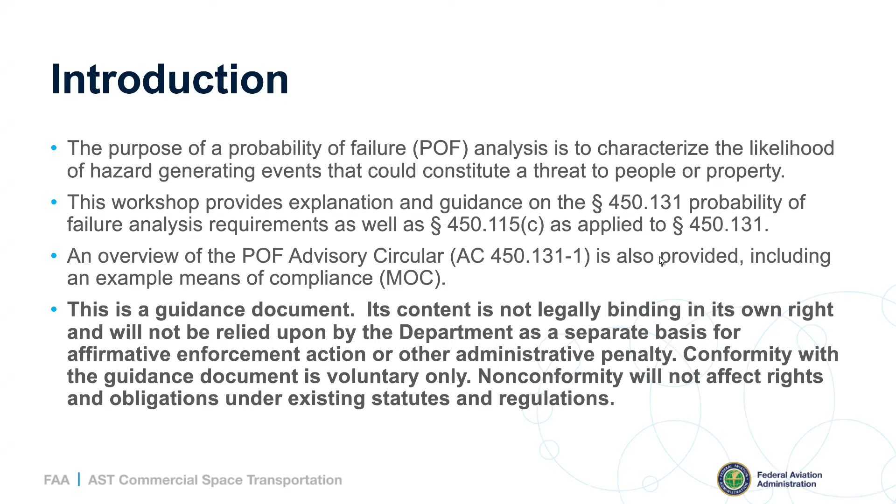Okay, so for this first section of the slides, I'm going to go over an explanation of each part of the 450.131 requirements. So 450.131(a) is a general overview of 131, and it states for each hazard and phase of flight, a flight safety analysis for a launch or reentry must account for vehicle failure probability. The probability of failure must be consistent for all hazards and phases of flight. So before I get into this, the way the AC is laid out and the way these slides are laid out, we go into detail on specific phrases used in the AC so that you all get a better understanding of the intent of the requirement.

So for example, 450.131(a) uses the phrase vehicle failure probability. This is the likelihood that a launch or reentry vehicle has a failure during flight. When we say for each hazard in the requirement, for each hazard means debris risk analysis, far field overpressure blast effects analysis, and toxic hazards. And then it also says for each phase of flight, the failure probability must be accounted for. So a phase of flight is a period of flight between two milestones in the vehicle flight sequence, where the probability of failure distribution for each reasonably foreseeable failure mode is homogeneous. A phase of flight can be discrete, such as stage separation, or it can be continuous, such as a stage burn.

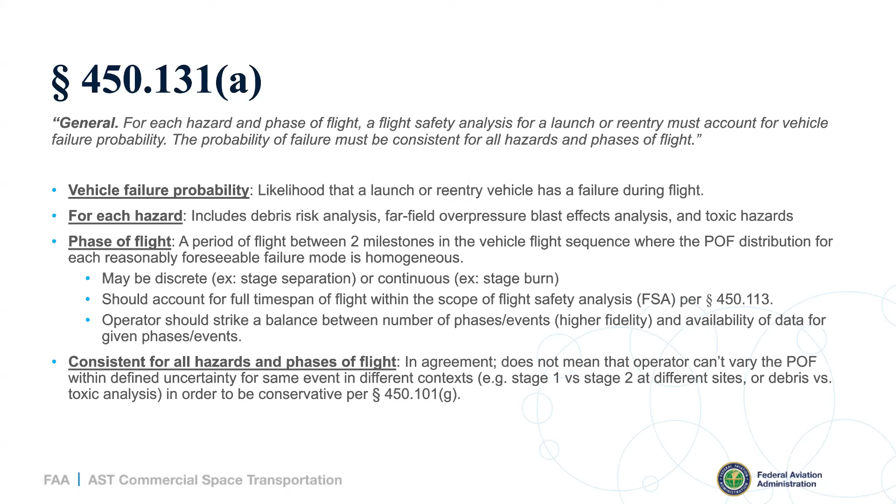Okay, so 450.131A describes the requirements for a vehicle or vehicle stage with fewer than 2 flights. And it states, for a vehicle with fewer than 2 flights, the failure probability estimate must account for the outcome of all previous flights of vehicles developed and launched or re-entered in similar circumstances. So the first thing to note here is the probability of failure requirement treats probability of failure analyses differently for the first 2 flights of a subject vehicle than flights after that. Historical data shows that experience makes a significant difference in failure likelihood.

One second, please. Can you go back? Sorry.

So how do you determine what constitutes a vehicle or vehicle stage in this context? So significant upgrades or configuration changes to a subject vehicle may make past flight history inapplicable or less relevant. And by less relevant, I mean weighted less if you're using a weighting methodology. So for example, significant upgrades or configuration changes can include an entirely new or upgraded stage, a new vehicle developer, if a vehicle is built up of stages and guidance systems on previous vehicle versions, but not as an integrated vehicle. So those are some examples of significant enough upgrades to make past history inapplicable or given less weight.

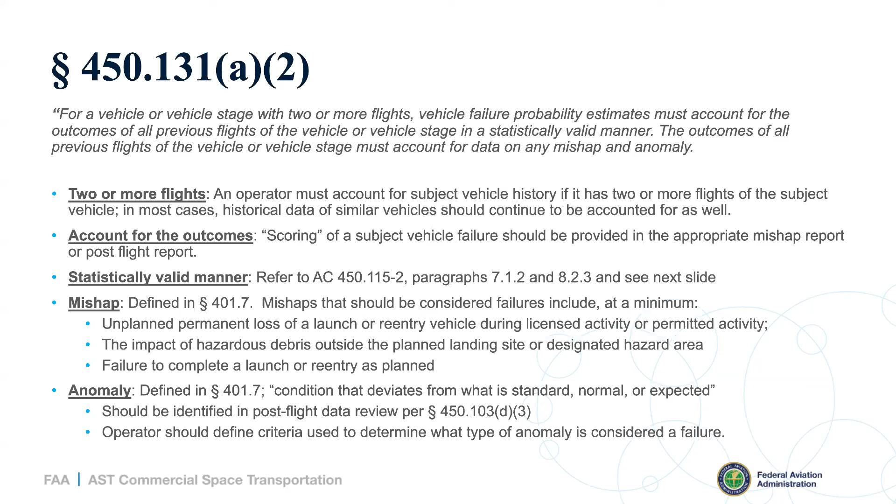Okay, so this is a little more on statistically valid manner. So an operator should have criteria that they should use as the checkpoint for the probability of failure method reevaluation. So basically, after a failure, an operator should have some kind of check to determine that their probability of failure method is still valid, or if it needs major or minor updates. This helps to continue ensuring compliance with 450-101G. That states that the method must produce results consistent with or more conservative than the results available from previous mishaps.

We did provide an equation that an operator may use as this checkpoint, and that's shown on the slide here. The inputs are the difference between flight ordinals of the two most recent failures, and then the conditional probability of failure predicted for the most recent failure. If the equation above holds true, the operator should then consider whether method updates are warranted.

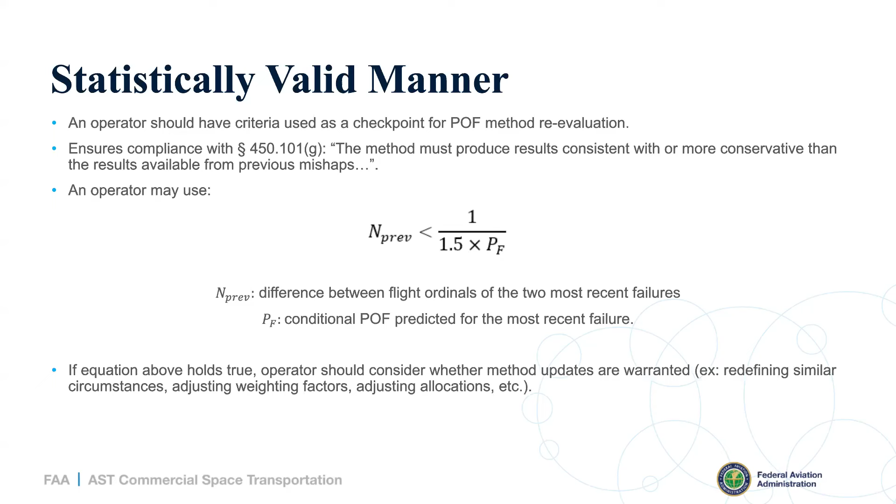And on purpose, we're not prescriptive about what warrants a method update, whether that's redefining similar circumstances, adjusting weighting factors, adjusting allocations, or perhaps the circumstances warrant no method update with justification provided. This is just to be used as a checkpoint. Okay, next slide.

So there was a question before we move on. There's also a question in the chat from Matt Georges. Are further productions of the same vehicle with the same production method considered new vehicles? Well, I would say that is not a sufficient criteria to determine whether or not a vehicle is new. Obviously, the similarity of design between a vehicle and a derivative or another one is the key thing.

So yes, there's not a firm line because we know vehicles are evolving with time, but the draft AC has some examples of what does constitute a new vehicle versus one that's still the same vehicle. So I would check the AC. There's more there, but same production methods is not a sufficient standard. Okay, thanks, Eric.

Okay, so 450-131B provides a definition of failure for use in the probability of failure analysis. For flight safety analysis purposes, a failure occurs when a vehicle does not complete any phase of normal flight, or when any anomalous condition exhibits the potential for a stage or its debris to impact the Earth or re-enter the atmosphere outside the normal trajectory envelope during the mission or any future mission of similar capability.

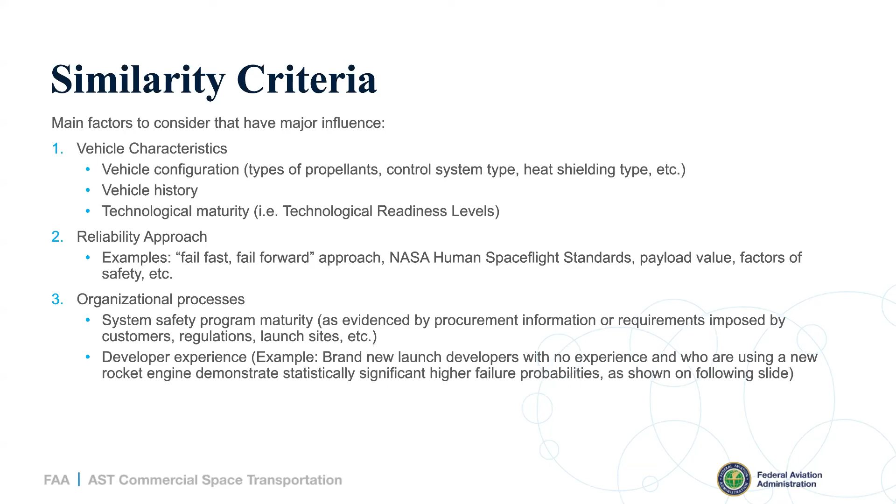Yes. Great. Okay, yes. So previous flight is defined in 450.131C. So for flight safety analysis purposes, the flight of a launch vehicle begins at a time in which a launch vehicle lifts off from the surface of the Earth. And then a flight of a reentry vehicle or deorbiting upper stage begins at a time in which a vehicle attempts to initiate a reentry.

So this goes back to a few of the questions we got. So this definition should be used to determine applicable flights of the subject vehicle or those historical vehicles that are developed and launched or re-entered in similar circumstances. So this may include amateur rockets, permitted activity, U.S. government launches, foreign launches, etc., or re-entries.

So what does liftoff from the surface of the Earth mean? So this occurs when a vehicle moves relative to the launch platform, whether that's land or water. This does include captive carry unless the demonstrated reliability exception applies for 113B. A deorbiting upper stage is a stage that returns or attempts to return from orbit to Earth in a controlled manner, including disposal. And then the time in which a vehicle attempts to initiate reentry is, we define this as the time at which reentry flight begins, a scope of license per 450.3C.

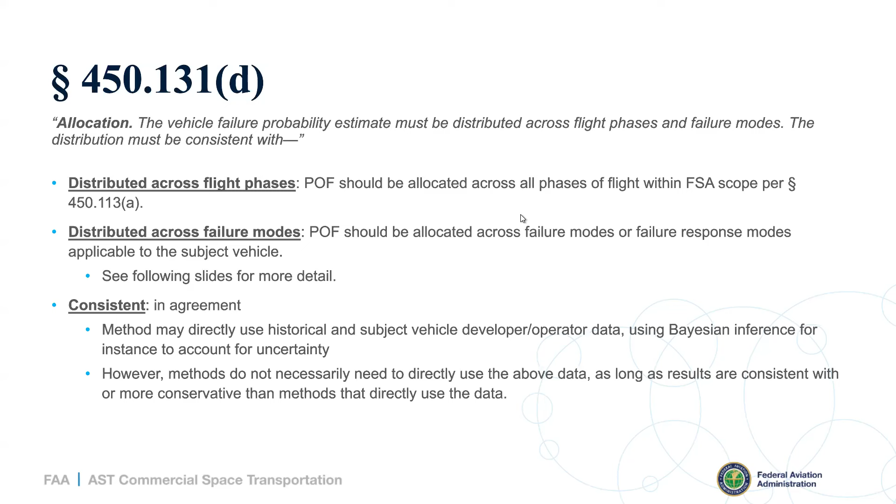So first we'll go into failure modes. So a failure mode is a unique combination of three elements: the initiating subsystem or system of the failure, the resulting manifestation of the failure, and the flight event where the failure occurs. So failure modes are used to classify historical failures and should be linked to the subject vehicle's functional hazard analysis.

So there are some examples of failure modes here. A propulsion system failure, turbopump failure of the only engine leading to a total loss of thrust during stage 2 burn, a guidance system failure leading to total loss of thrust during stage 2 burn, a propulsion system failure leading to no thrust during initiation of stage 2, and a flight safety system failure, such as data to the MFCO screen lost, leading to a loss of thrust during stage 2 burn. So these examples were chosen because they show that multiple failure modes may have the same response, which is that stage 2 loss of thrust.

The initiating subsystem element is necessary because what causes one type of failure on a historical vehicle can cause a different failure on the subject vehicle. For instance, an engine failure may result in a loss of thrust response for a single engine stage, but it could result in a degraded thrust response on a multi-engine stage. So the next slide, I'll discuss more on failure response modes.

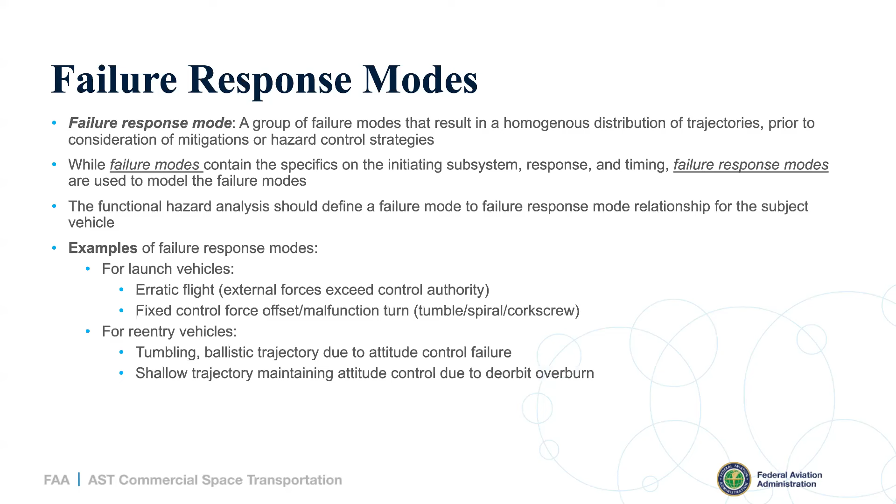So for launch vehicles, that would be erratic flight, or fixed control, force offset, or malfunction turns. For reentry vehicles, that could be a tumbling ballistic trajectory due to attitude control failure, and a shallow trajectory maintaining attitude control due to deorbit overburn. Next slide, please.

Okay, so the next few slides describe the data that the allocation must be consistent with. So the first part is the data available from all previous flights of vehicles developed and launched or re-entered in similar circumstances. So similarity criteria, as described previously, should be used to collect historical failure data to be used as the basis for the failure mode allocation.

It's also noted that the similarity criteria here may be less restrictive than the criteria used for calculating the overall probability of failure or the by-phase probability of failure due to limited failure data. What's most important is that the failure modes are reasonably foreseeable for the subject vehicle and phase event.

So an example given here, turbo pump failure of a liquid propellant engine during stage 1 burn would be a credible failure mode for other liquid propellant engine burn stages, but it wouldn't apply to a solid propellant motor burn stage. Next slide, please.

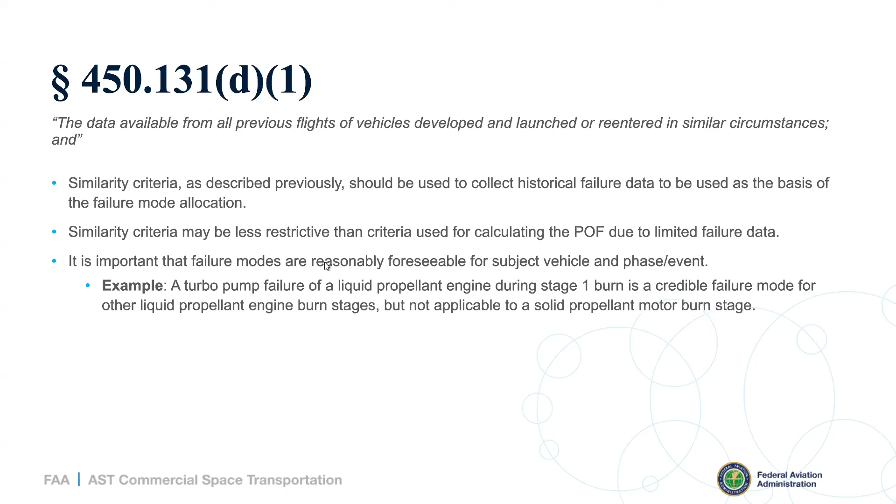So the allocation must also be consistent with the data from previous flights of the vehicle stages or components developed and launched, re-entered, flown, or tested by the subject vehicle developer or operator. Such data may include previous experience involving similar vehicle, stage, or component design characteristics, development and integration processes, including the extent of integrated system testing, and level of experience of the vehicle operation and development team members.

So previous experience of the subject vehicle developer or operator should be accounted for when determining the probability of failure allocation, in addition to the flight outcomes of vehicles developed and launched or re-entered in similar circumstances. Previous experience may include past launches, re-entries, and tests, and that may include drop tests or glide flights. Tests may also be considered inapplicable or given less weight if the test environment was less severe, or if the intent was to test to fail, etc.

And then similarity criteria, as described previously, again, may be considered here as applied to previous experience of the subject developer or operator for allocation purposes. So an example is if there's been significant staff turnover since the developer or operator's previous experience, and the new staff doesn't have a lot of experience with the new technology, then the previous experience may be weighed less when determining allocation. Next slide, please.

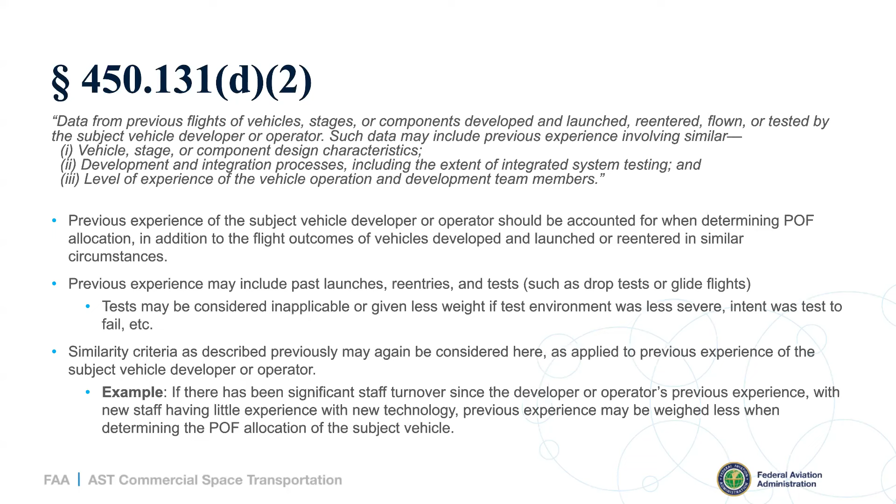Okay, so 450.131(e) describes the requirements for observed versus conditional failure rates. The probability of failure allocation must account for significant differences in the observed failure and the conditional failure rate. A probability of failure analysis must use a constant conditional failure rate for each phase of flight, unless there's clear and convincing evidence of a different conditional failure rate for a particular vehicle, stage, or phase of flight.

So first, we define observed and conditional failure rates. The observed failure rate is the ratio of failures to attempts in a defined period of flight divided by the duration of the period. You'll also hear this called the unconditional failure rate or the absolute failure rate. The conditional failure rate is the probability per unit of time that a failure will occur at a given time, assuming success prior to that time. And we'll show some examples in the next couple slides.

So what does "must account for significant differences" mean? This means that when calculating the observed failure rate, the likelihood of success in previous phases should be included in the calculation. Constant conditional failure rate is one that is uniformly distributed over time. This is a reasonable assumption to use unless there is clear and convincing evidence otherwise.

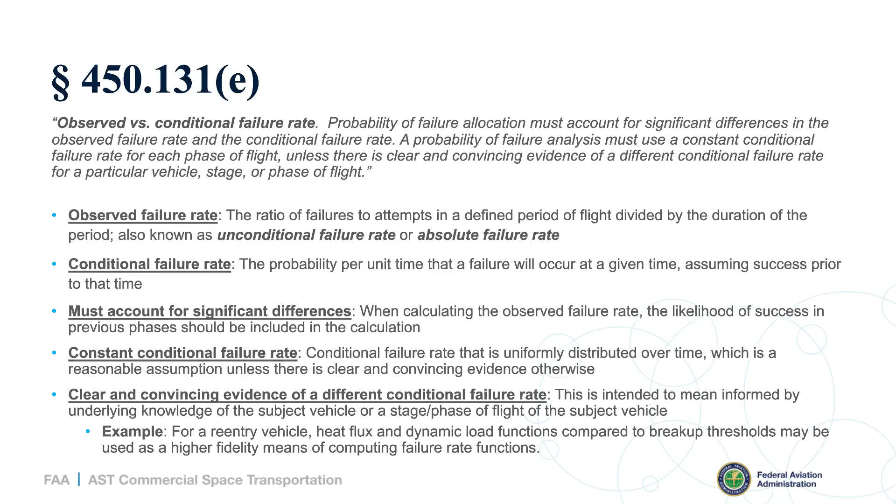So the failure rate equations for a constant conditional failure rate and the observed failure rate are given here. The draft AC also has worked out examples for a simple two-stage launch vehicle. Next slide, please.

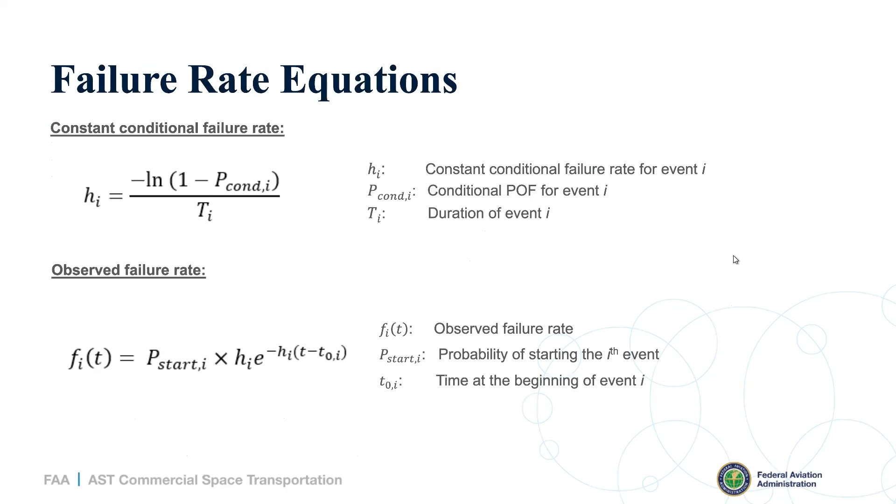Again, the full worked example is in the draft AC, but you can see the results here, again, for a simple two-stage launch vehicle, assuming a constant conditional failure rate. The plot shows that the observed failure rate in the dotted line here is lower than the conditional failure rate. And that's because the probability of early flight failure makes it less probable that failures at later flight times will be observed. Next slide, please.

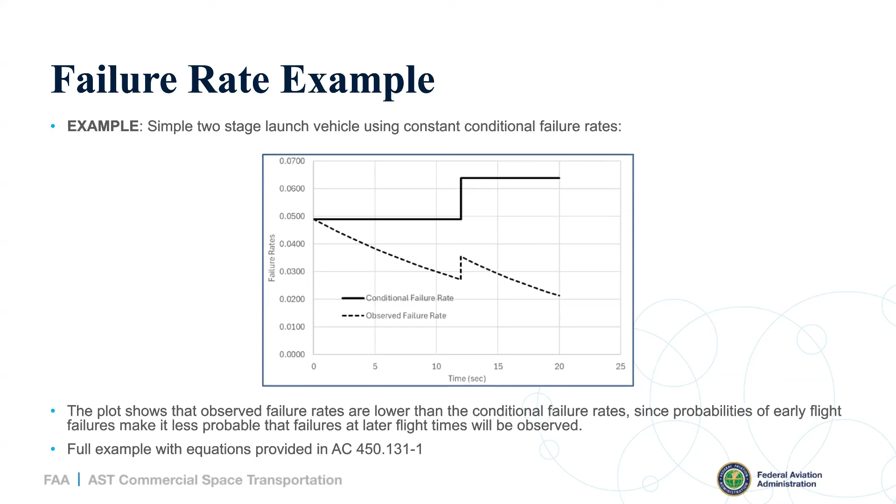So next we'll go over the application requirements for 450.131. So the first application requirement is a description of the methods used in the probability of failure analysis in accordance with 115(c). So a lot of that is what I've discussed already today. The probability of failure method should address each part of 131(a) through (e), as well as each part of 450.115(c)(1) through (6). And I'll talk a little more about the 115(c)(1) through (6).

Some resources are listed here as well. The AC 450.115-2 provides general guidance on documenting an FSA methodology. And then the draft AC for 131 provides a thoroughness checklist that an applicant can use to ensure that they have met each part of the requirement. Next slide, please.

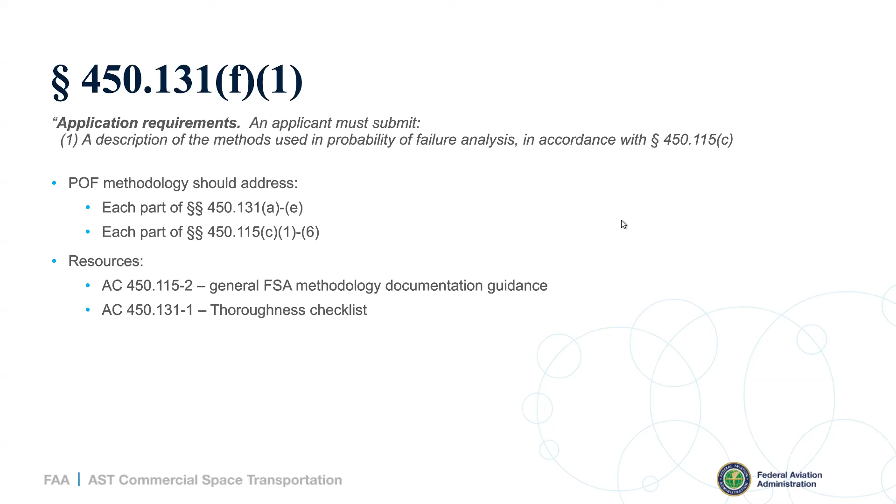And then next, an applicant must submit a representative set of tabular data and graphs of the predicted failure rate and the cumulative failure probability for each foreseeable failure mode. So to break this down a little further, the tabular data should include the conditional failure rates by failure mode, the cumulative observed probability of failure by failure mode, and then the total observed probability of failure. The graph should include the observed failure rates by failure mode and the cumulative observed probability of failure by failure mode. And I'll show examples on the next slides.

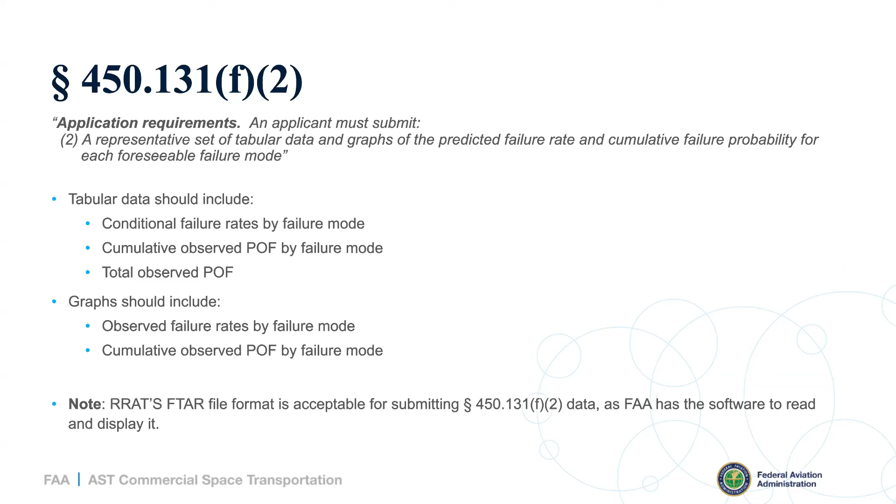Also a note here, RRAT's FTAR file or ABRDR's FTAR file format is acceptable for submitting this tabular data and graphs, since FAA has the software to display it. Next slide, please.

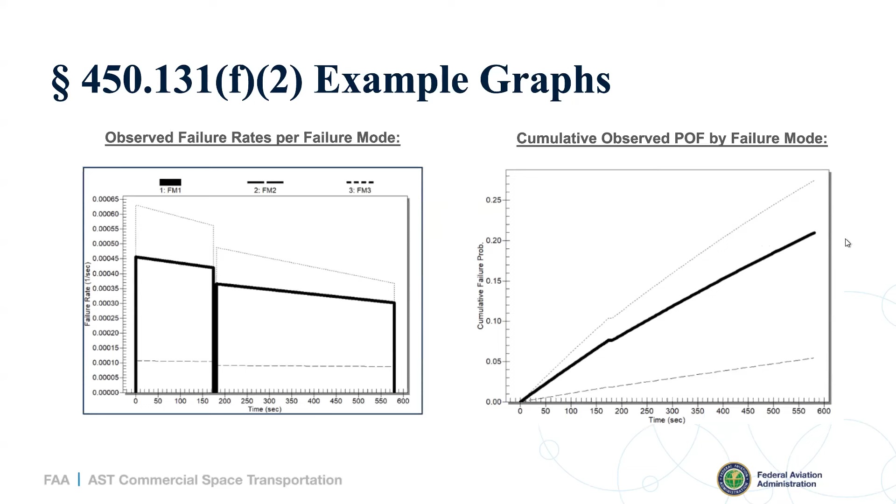Okay, so as I mentioned before, the probability of failure methodology should address each part of 115(c)(1) through (c)(6). Excuse me. Okay, sorry. Should address each part of (c)(1) through (c)(6). So for (c)(1) and (c)(2), I put some overall considerations on this slide.

The method should begin with the scope of applicability, including what flights the method applies to, vehicle configurations, etc. Some other examples of what should be documented in the method include how the similar circumstances term is defined, how statistically valid is defined, descriptions of how data parameterization, data loading, and data selection is performed if using a database for the probability of failure calculations. Flight event phase and decomposition, including sequences and dependencies. Any conditional and observed probability of failure and failure rate calculations.

What equations are used. How the failure is defined with respect to the subject vehicle, mishaps and anomalies, any allocation calculations, and how uncertainty is incorporated. The operator should clearly state assumptions, justifications, and logic used throughout the method. And this slide is not meant to be all-inclusive. Please refer to the thoroughness checklist included in the draft AC. Next slide, please.

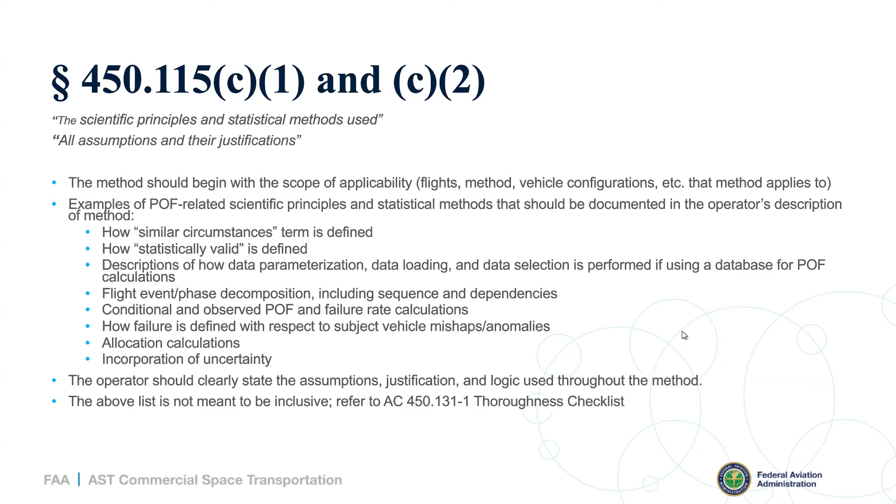So 450.115(c)(3) is the rationale for the level of fidelity. So the level of fidelity of the probability of failure method should be assessed, including the bias and uncertainty of the method. And this is described more again in the 115-2 AC that is available.

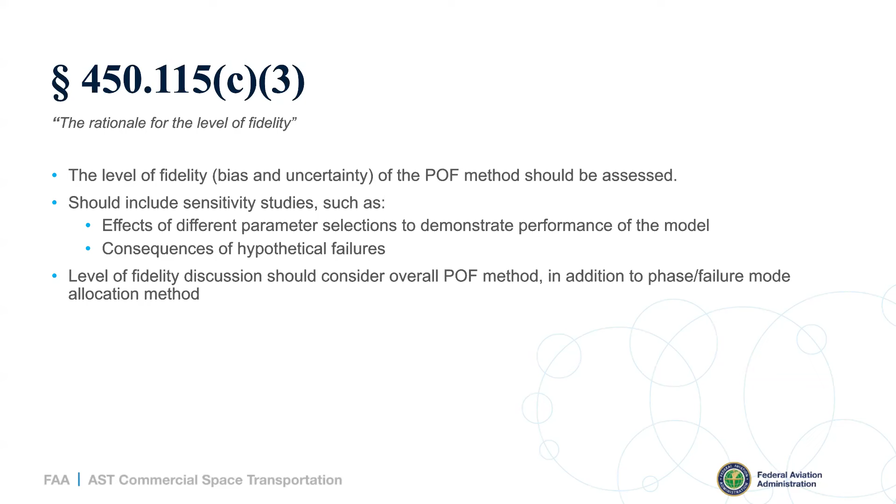The discussion on 115(c)(3) should include sensitivity studies, such as the effects of different parameter selections to demonstrate performance of the model, and a sensitivity study that could include consequences of hypothetical failures. And then the level of fidelity discussion should consider both the overall method in addition to any allocation method used. Next slide, please.

The evidence for validation and verification required by 450.101(g) is what's required by 115(c)(4). As I keep mentioning, the 115-2 AC has more on this in general, but for probability of failure specifically, this should include a description of the review process, including the validation of historical flight data collection, any updates and accessibility. Basically, how does the operator confirm that the data used is valid?

And then validation of the vehicle analysis for flight phases, flight events, phases, and failure modes. How does the operator confirm that all phases and failure modes are accounted for? And this section should also include any verification and validation evidence of software tools. And if only spreadsheets are used, then there should be evidence of validation of the formulas within the spreadsheet itself, rather than providing V&V of the Excel program. Next slide, please.

115C5 describes the extent to which the benchmark conditions are comparable to foreseeable conditions of the intended operations. So benchmark conditions for the probability of failure analysis should include a comparison of how the method performs under different conditions, such as applied to flight history of other historical vehicles. And then there should also be a description of the check for validity of the method during the post-flight data review. So this is the checkpoint, such as using the example equation provided previously for method reevaluation that we talked about earlier. Next slide, please.

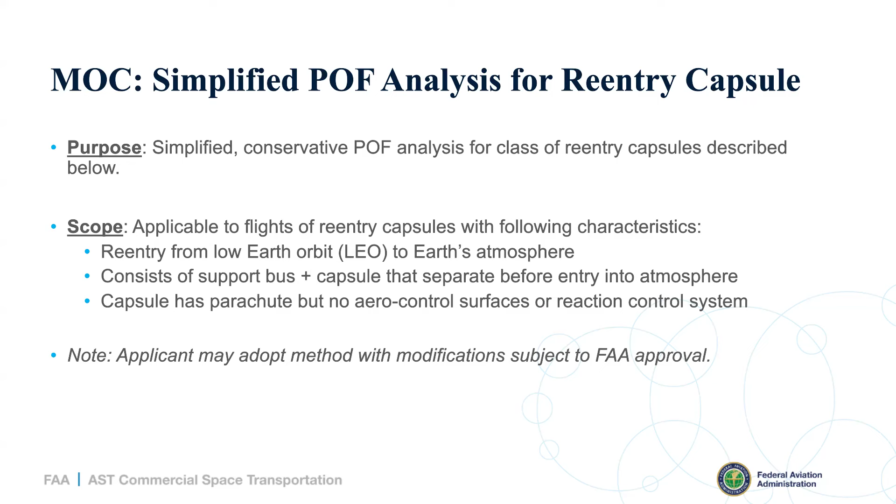Reentry is from low Earth orbit to Earth's atmosphere. The vehicle consists of the support bus and a capsule that separate before entry into the atmosphere. And the capsule has a parachute, but no aero control surfaces or reaction control system. Just to note here, the applicant may adopt this method with modifications subject to FAA approval. So if an operator's vehicle is slightly outside of scope, but they still think this method mostly applies, they can apply modifications subject to FAA approval. Next slide, please.

So step one, starting with a nominal trajectory, identify milestones and divide the reentry into flight phases. The flight phases must cover the scope of the FSA per 450.113(a)(4). The milestones for the reentry capsule are listed here: deorbit burn start, deorbit burn end, capsule bus separation, entry interface, start of main heating, end of main heating, parachute deployment, and touchdown.

From there, flight phases are defined using those milestones, with a clearly defined start and end to each flight phase. So when an applicant uses the MOC directly and their vehicle falls within the scope, they can use these flight phases as defined here. Next slide, please.

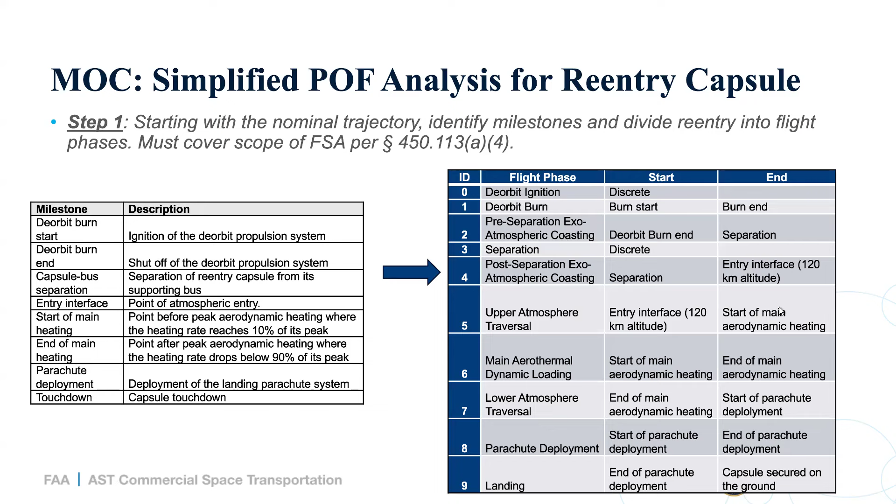Step two is to identify the reasonably foreseeable failure response modes per flight phase. Those failure response modes are listed here. They include random reentry, incorrect start state vector, ballistic tumble, underburn, overburn, explosion and uncontrolled intact fall, aerodynamics error, aerothermal and aerodynamic breakup, ballistic fall, and partial parachute.

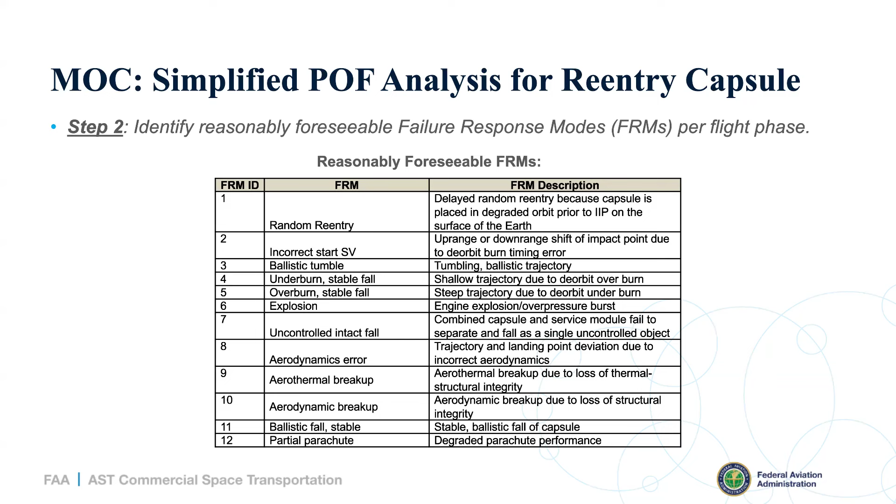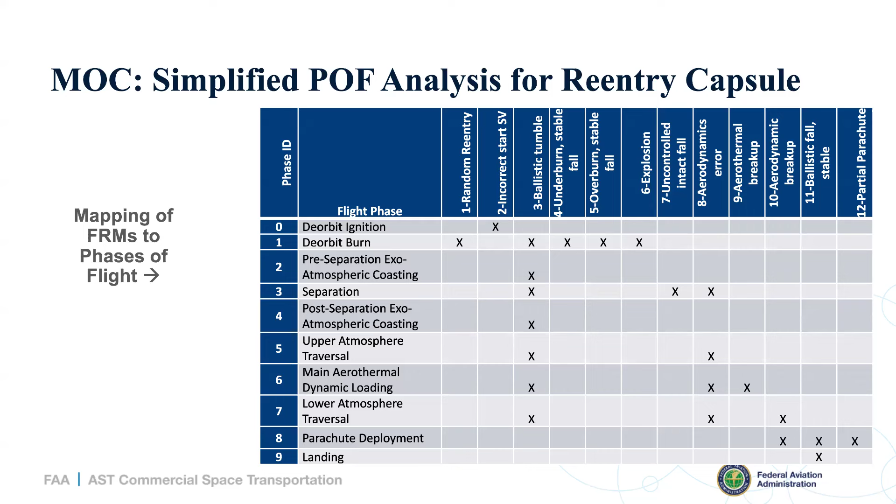So step three, you would assume a conditional probability of failure of 1 per failure response mode per phase. And from there, you can compute the conditional failure rate per failure response mode per phase, and then the observed failure rate and the cumulative probabilities of failure. And the FAA has provided equations that they have determined is reasonable to use if applying this MOC.

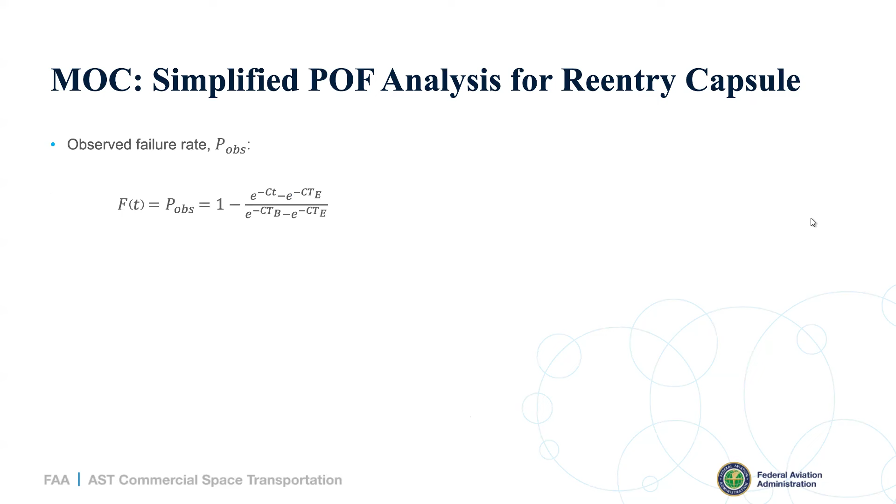Step 4 is to create a representative set of tabular data and graphs as required by 450.131(f)(2). So a note here, the cumulative failure probability per phase is equal to the number of failure response modes, and that's because the cumulative failure probability is equal to 1 per failure response mode per phase.

So you go through steps 1 through 4 for the nominal trajectory itself, and then you would repeat steps 1 through 3 for each of the variability trajectories. We wouldn't require the tabular data and graphs for each variability trajectory. Next slide, please.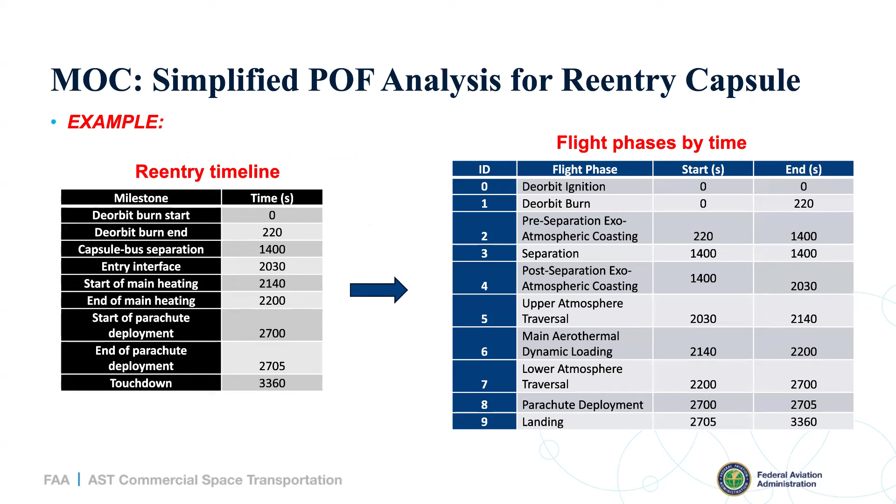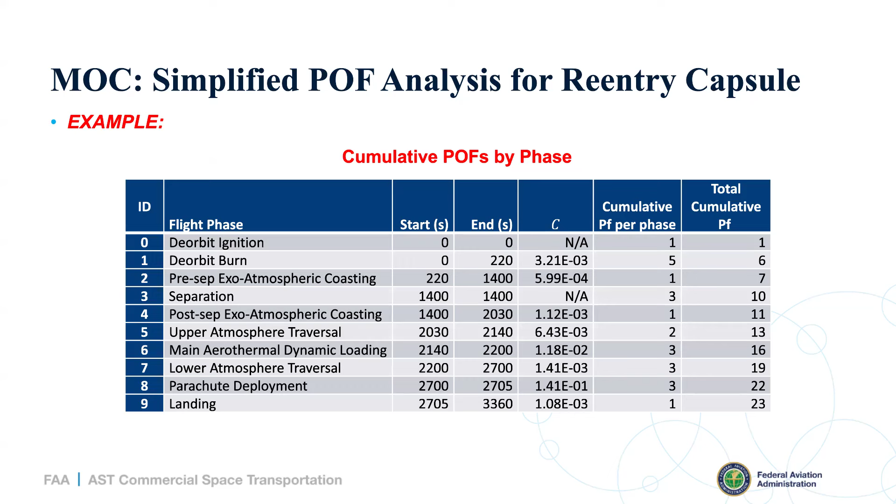And then the applicant would calculate this table using their specific flight timeline to calculate the C parameter, and then in turn the cumulative probability of failure per phase, which ends up being the number of failure modes per phase, and then the total cumulative probability of failure. Next slide, please.

And then here are examples of the plots that would be provided if you were to use the example MOC. The left shows the observed failure rates, and then the right shows the cumulative probability of failure summed across all phases and failure response modes. Next slide, please. And that is all I have.

I think I saw some questions in the chat. Yep, just a few more questions. So first question, where would the key flight safety events be addressed in this means of compliance? Should they be included in step one, or is it something addressed separately? So if you're using this MOC, you can use those flight phases directly. Does that answer the question?

Saying that FAA has established that separately those flight phases meet the criteria for not having more than one key flight safety event, and we don't have to provide anything else to verify that. For the probability of failure analysis, correct. Yeah. I'm not sure what the other requirements are that require the key flight safety events off the top of my head. I think you would still have to provide those.

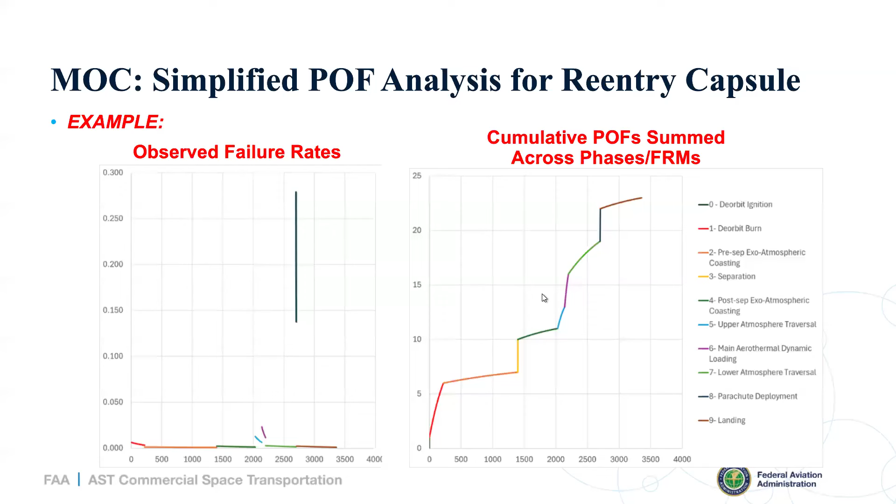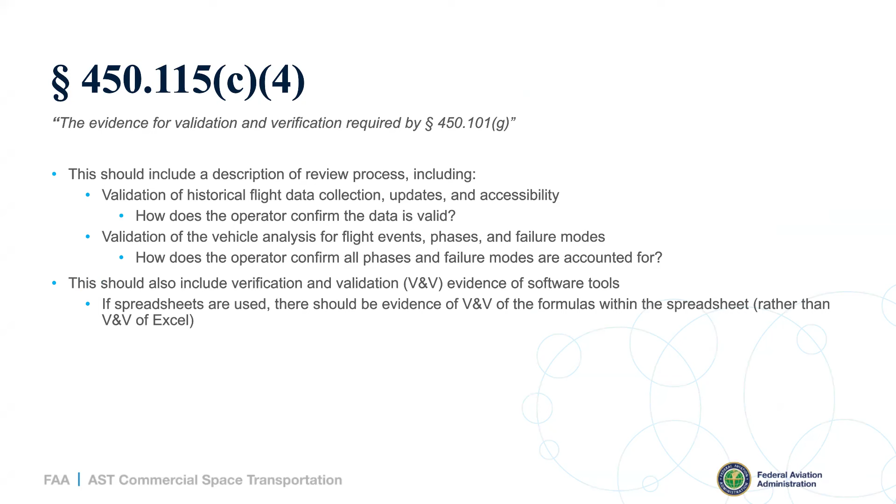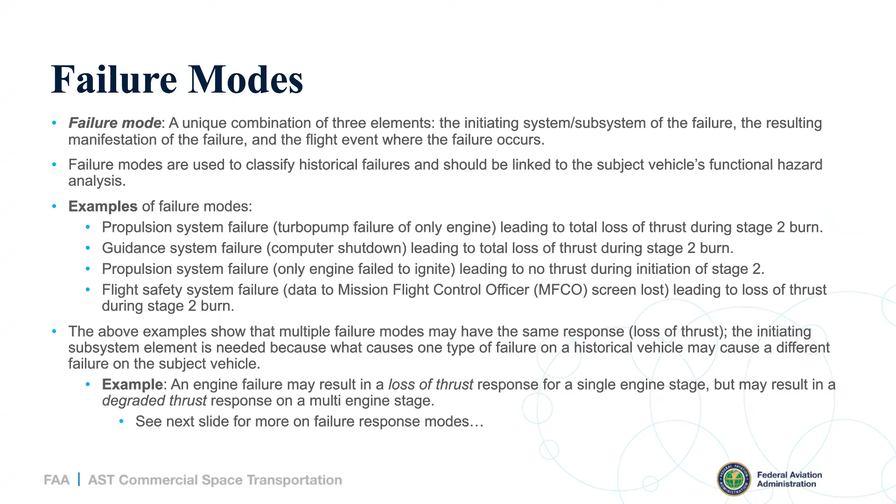The language in here and in the AC was saying, when you're trying to figure out if something exhibits the potential, assess if it likely would have caused a failure on another mission. And I wanted to get the FAA's opinion on how much weight operators should put behind that language, because likely would have caused a failure is a bit of a higher bar than I think we have historically seen applied to the exhibits the potential language. Previously, I would say the bar that has been applied is, could it possibly have caused a failure? And if it could have possibly caused a failure, then it meets the exhibits the potential. But in the AC, you're saying it needs to likely cause a failure. So yeah, I wanted to see if you had thoughts on that.

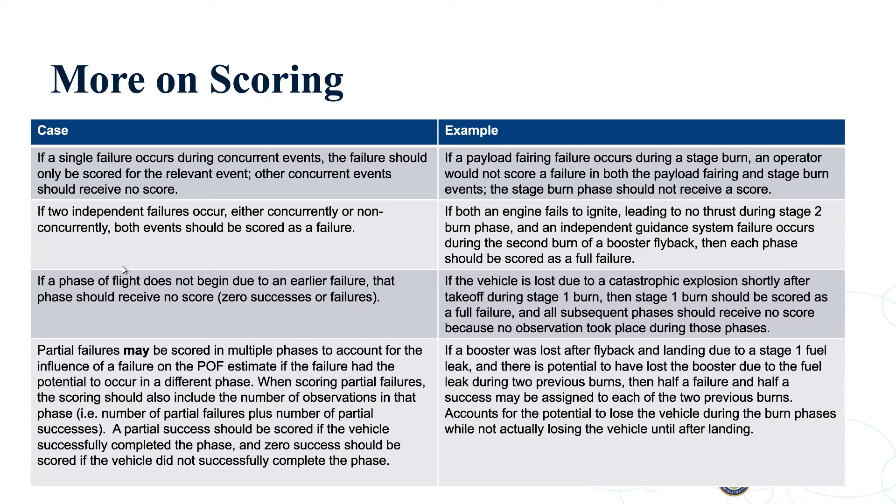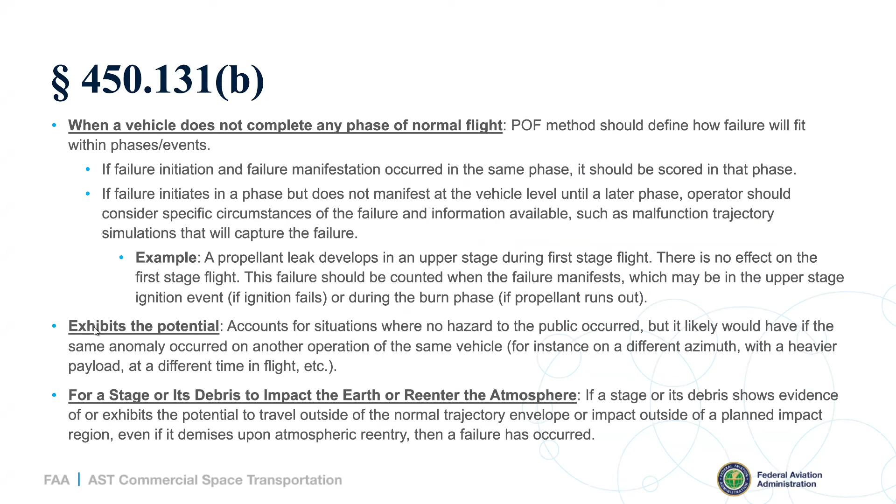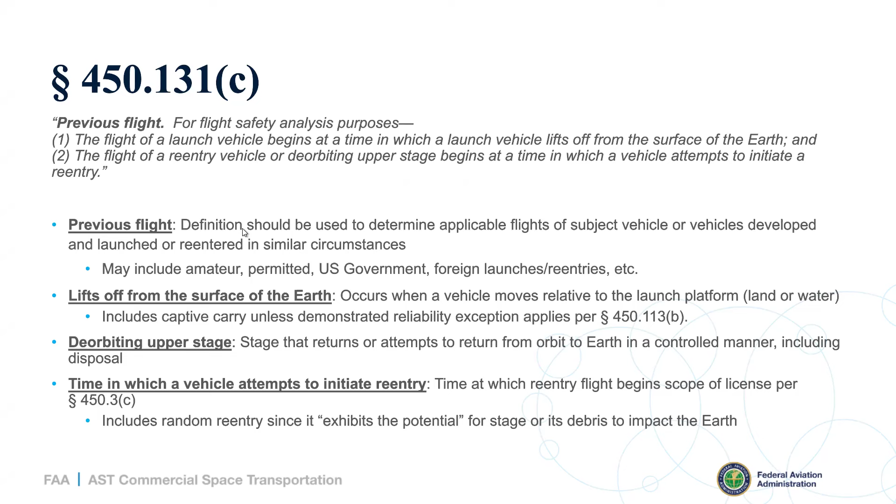Can you submit a comment on that one? I understand what you're saying. Okay, yeah, submit a comment on that one. I look back at the actual AC text too. It's section 6.44. Yeah, we acknowledge this is a gray area. We tried to provide some specific examples in here, but additional comments would be helpful for us to consider, I think.